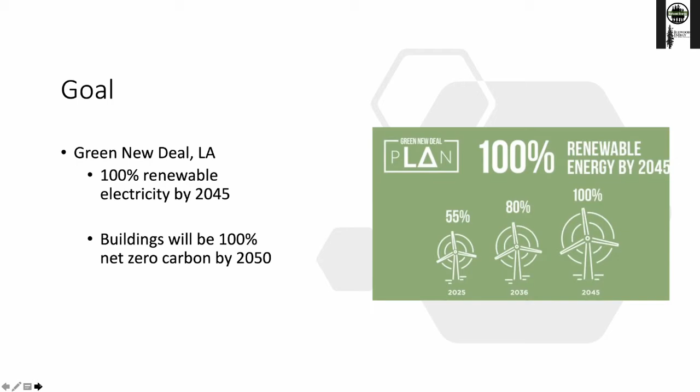So in LA specifically, we do have a goal to have 100% renewable electricity by 2045, which is just around the corner, and we'll be here in no time. And then for buildings to be net zero carbon by 2050.

So again, how will we be able to reach these goals? It will be through decarbonizing buildings, electrifying our grid, and electrifying building end uses, like heating and cooling, and reducing our energy demand.

There are other options such as renewable natural gas, which isn't actually renewable. It's not cost effective, and we wouldn't end up meeting our goals. So in the crush to achieve our sustainability goals, we have to be wary of actual progress versus energy electrification applications that are actually sustainable.

So this is where I get into more about technologies around building electrification and what's actually being used. Since our buildings account for so much energy use and greenhouse gas emissions, it's important to accompany progress with technological advances.

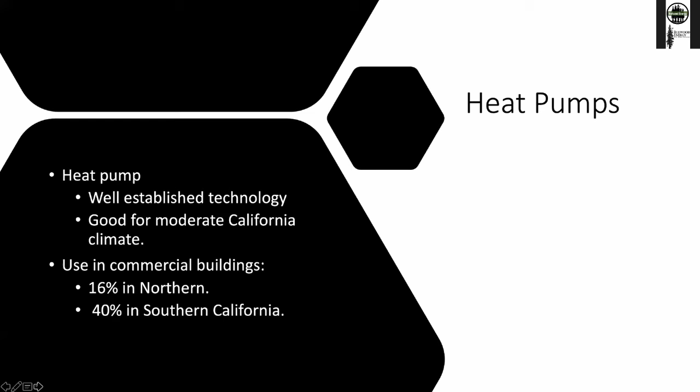So a common and current technology are heat pumps. We live in a moderate climate, so there hasn't been a lot of focus on adjusting heat pumps for our climates, but they tend to be less efficient in colder climates. There's been some emerging technologies to make them much more effective and efficient. Heat pumps are a great option, a lot less expensive to operate, especially compared to gas furnaces, and any type of renewable gas can triple in cost. We use them more here in Southern California than Northern California, but as we push to electrify the building sector, their use will become more common.

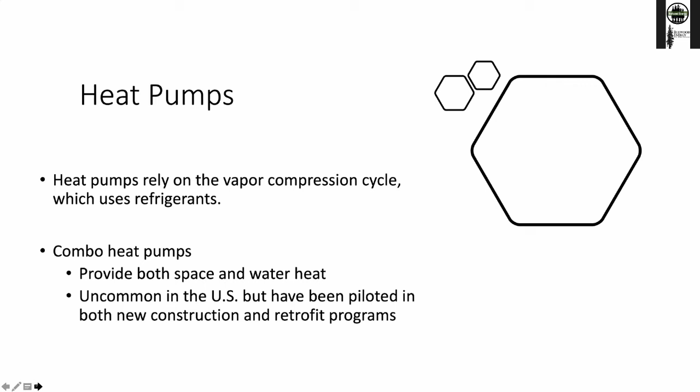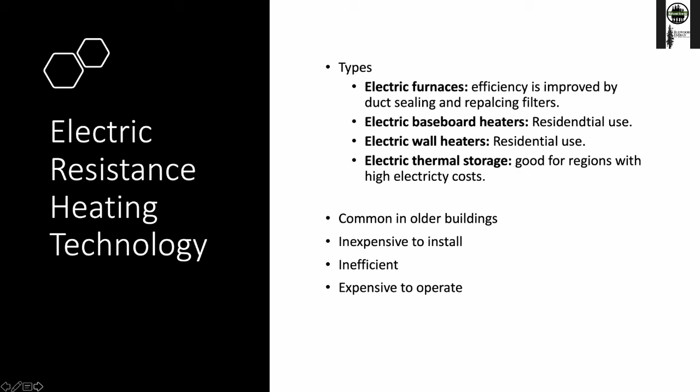Next. Okay, moving on to water heating. We're going to look at tankless and heat pump for water heating.

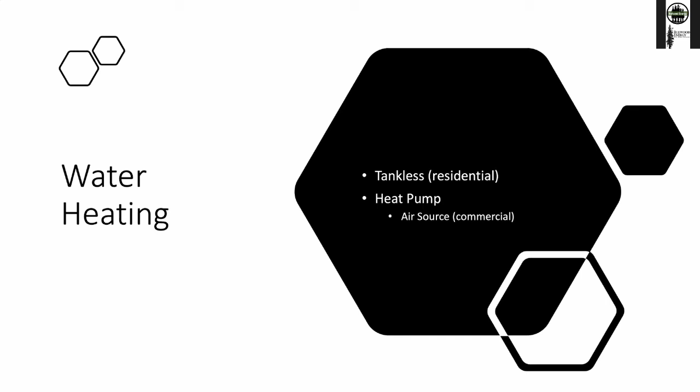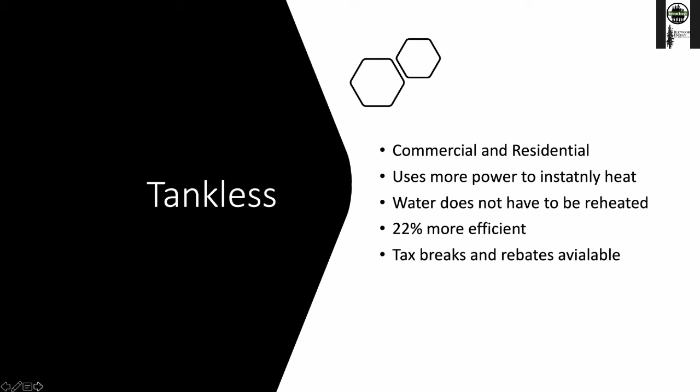Tankless is more popular in residential, but it can also be used in commercial buildings. It can be more expensive because of the need for distribution versus in a home. For larger buildings, the amount of energy required to heat the water instantaneously can come at a higher cost, and may not be so efficient on a larger building. But in residential, they are really popular - I have one - and there are tax incentives and rebates available.

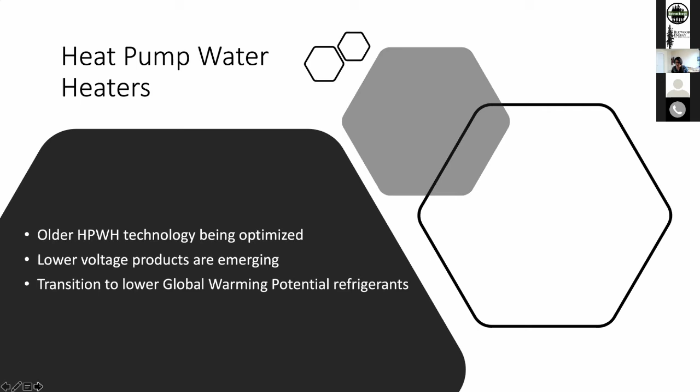Next slide. Heat pump water heaters is also an older technology, but it's going through a more recent research and development phase to be optimized. Like I said for space heating, they're working on different technologies that won't use refrigerants or will have a lot lower global warming potential. But we really need to come up with much better technologies, and I know some of my colleagues at this conference have talked about some of those things.

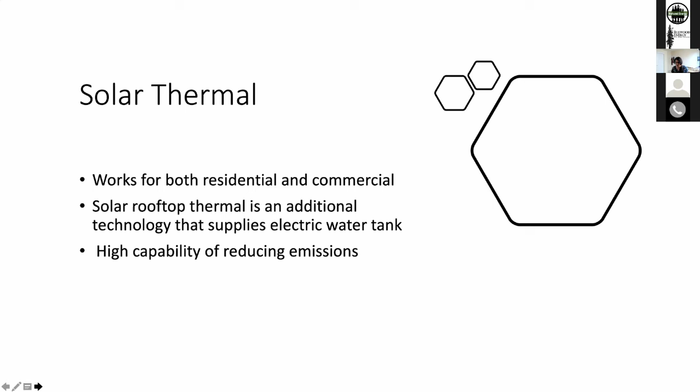Okay, next. Solar thermal, I feel like, kind of gets left behind a little bit. It can be effective for both residential and commercial, though it's less common in the commercial sector. But it's definitely a water heating technology that's really efficient and has a really positive impact on the environment, since it can be a passive heating technology.

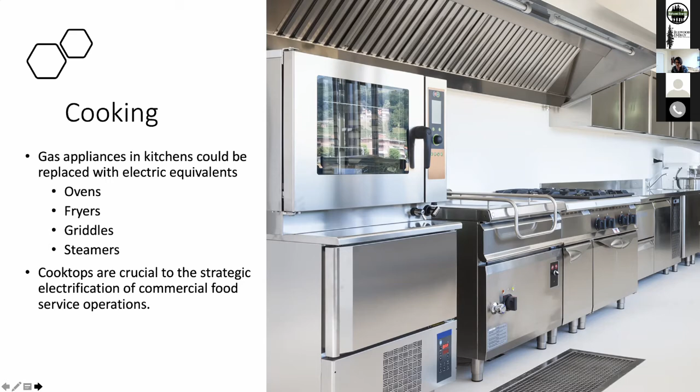And cooking, which is my personal favorite, and the fight to get more electric appliances in the kitchen for a number of reasons. Just being around gas cooking appliances is hard on people's health, especially if you have compromised respiratory systems. Everything in the kitchen can be electrified, which is great, and you won't really notice that much of a difference in the food quality, but that can remain up for debate.

Next slide. So some of the most common technologies used for cooking electrification is induction. Induction stovetops are pretty versatile, and I know cooking is just a very personal thing to the culinary industry, so having a variety of options is important, and that's where we find a lot of our sticking points with our customers. There's also countertop induction woks, which can be used in larger commercial kitchens, but are a little more popular for light duty work - also a viable option.

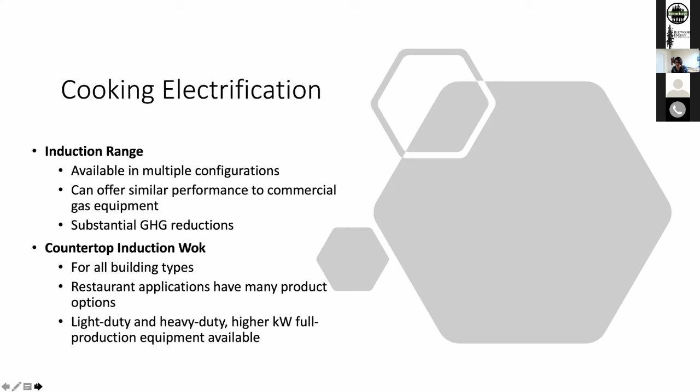Next. And again, like I was saying, most commercial or most cooking equipment can be electrified, and this can be one of our larger sticking points in the commercial building industry when trying to electrify portfolios. So just knowing which options are available and the reality of those options and the benefits they provide could help close that gap and that resistance.

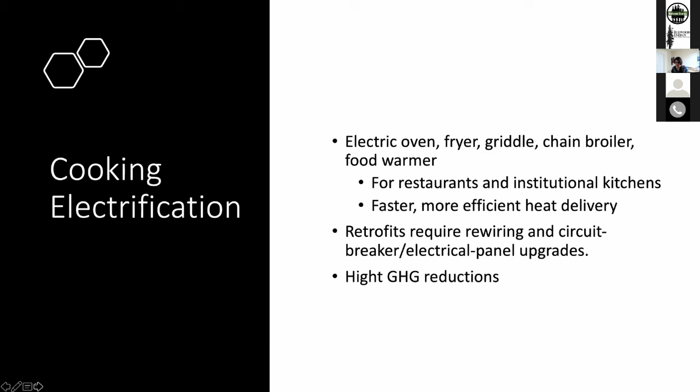Retrofit for electrification can be a little bit more labor intensive, and sometimes you can even need a new electrical panel, and that goes for all electrification. But it's definitely worth the savings and the health benefits.

Okay, and then last, which I thought was interesting, is clothes drying and laundry, and how those items can be electrified. Commercial and multifamily building systems use a lot of energy for clothes drying and laundry, just because of the quantity and the loads are really heavy, and the amount of energy that goes to pulling the moisture out of the clothing and physically moving it, the mechanics of that. It can account for over 80% of the energy used to do laundry going to drying.

Okay, so clothes drying and laundry electrification, some technologies that we have. Standard electric heat resistance dryer, we're all familiar with that, and it's used in all building types, but it doesn't have a huge benefit as far as the amount of progress we need to make in reducing our carbon emissions.

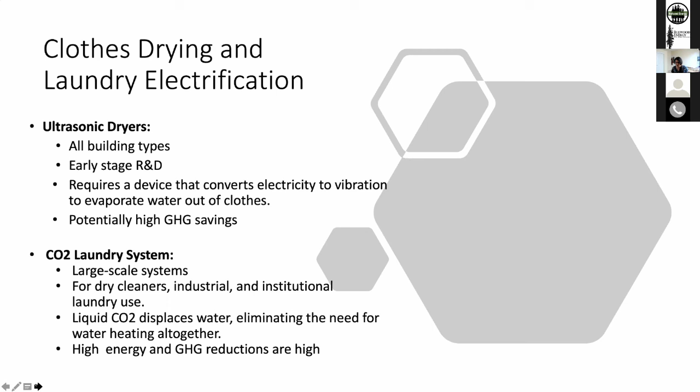Okay, next slide. So, in doing some research behind the future of electrification and thinking about where we're at right now, some takeaways are: decarbonizing the building sector through electrification and other methods is really critical for us being able to survive these global warming impacts that have already started. We're not out of time, but we are running out of time.

Also, I know through electrification, people and clients are often concerned about the upfront cost, but in the long run it does save money. And as more technologies emerge, and new research and development emerges, costs can decrease for different electrification technologies.

And as far as acquiring electricity from the grid, I know it depends on where you're located and those prices. But yeah, lastly, I just want to reiterate that not all these electrification technologies are perfect, and we have a lot of work to do, and refrigerants being part of that is a really big part of that. So I'm looking forward to seeing what else is forthcoming in the years to come, and seeing us meet our goals.

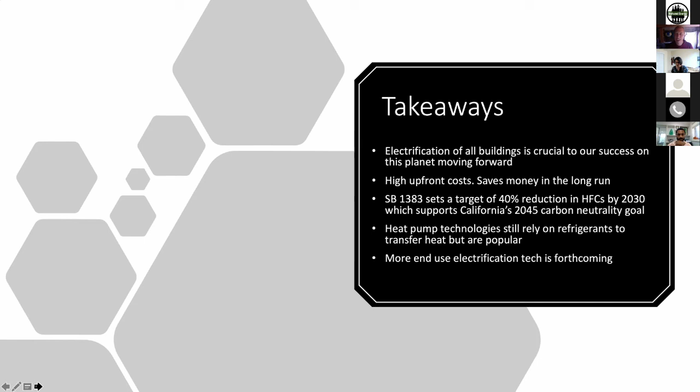I think that's it. I might have one last slide. Oh, pardon me, you had that sort of air of finality. The future of electrification is bright - all the puns intended.

Nicely done, thank you Jasmine. I had a question, I haven't gotten a chance to go over to chats, but a question I had is, you are the sustainability manager at Kilroy, this is a large realty company. What is Kilroy, how are they responding to the message that you're bringing to them in terms of electrifying either new construction or retrofits?

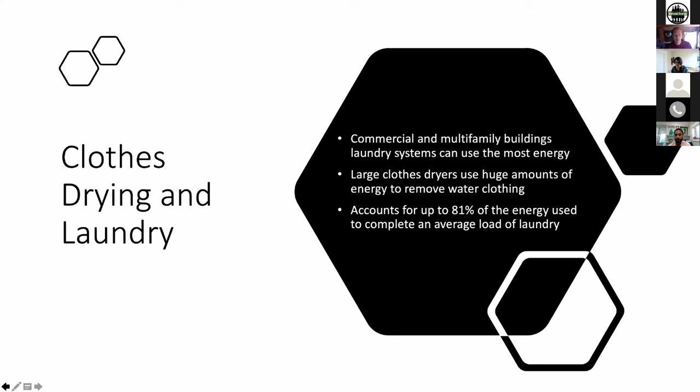They're already there. We have 3 electric buildings, actually one was displayed on one of my slides. It's called On Vine, and that was recently opened, the Netflix campus. So Kilroy has always been a huge proponent of electrifying buildings and has taken huge steps to work towards our portfolio goals, which then impact city and state goals and so on. It's been really rewarding to be part of a team that's so enthusiastic about this stuff and always looking for new efficiency projects and electrification options. We're always brainstorming about stuff.

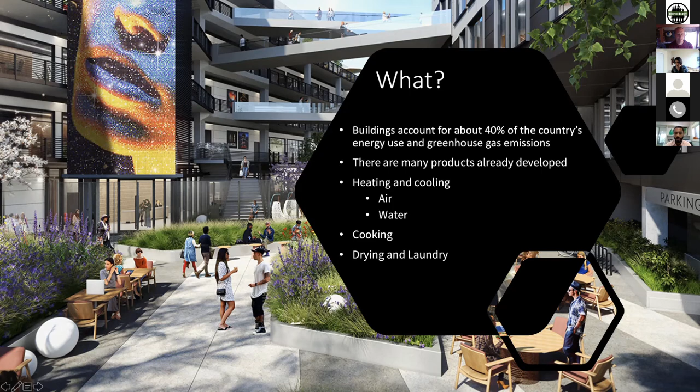That's awesome to hear. One of the other things you surprised me with was that there was 40% of the commercial buildings down in the LA area or Southern California using heat pumps now. Most of the buildings are in California, in Southern California. So that's much more widespread than I would have expected.